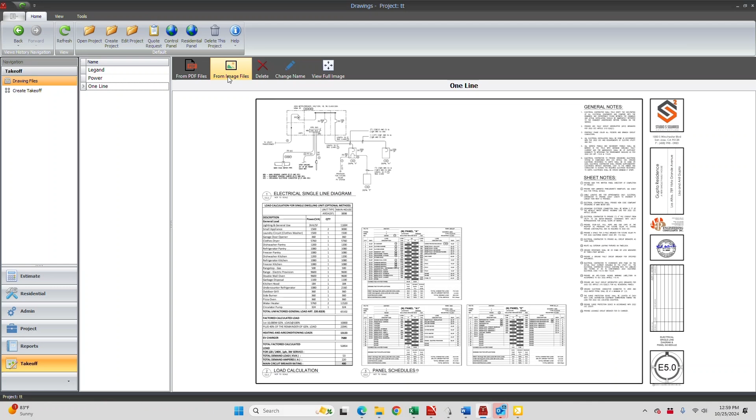Select from image file. You can also import multiple PDFs at one time. It's just a new feature. So you would select that, select the file, and let's say that this is split out.

So you can batch import, holding the Shift key down, a selection of files, and hit OK and import.

We're going to import these 7 pages. That keeps you from having to import them one at a time if you wanted to add to the list.

So we're going to give it a second to import, then we're going to talk about that.

Okay, so now we've added these 7 pages just randomly selected, and we can see that there are MEP pages. That was just by luck, I didn't know what the pages were.

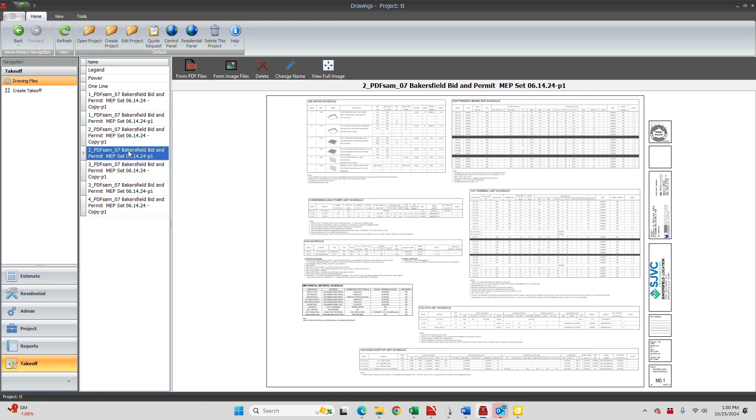In reality, they wouldn't be of any use to the electrical, but you can still reveal them to see if there's anything on them that you might make use of.

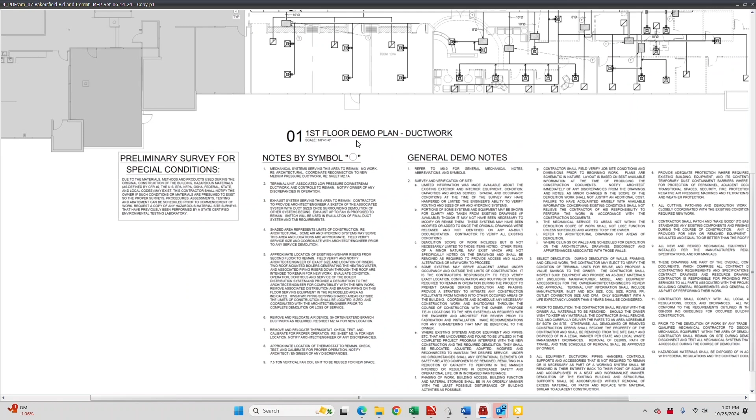So also another feature is if you hold the Shift key and use your roller mouse, the screen goes left to right. So you have up and down for the zoom, and then left to right, all from the mouse. Was a pretty good feature.

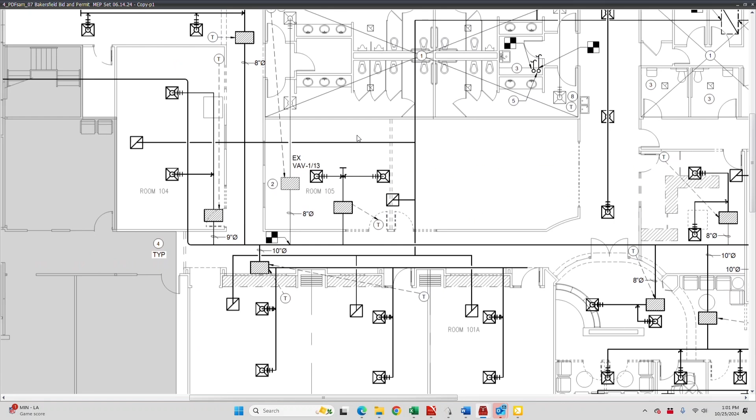Again, you would want to rename just as something reasonable in MO.1.

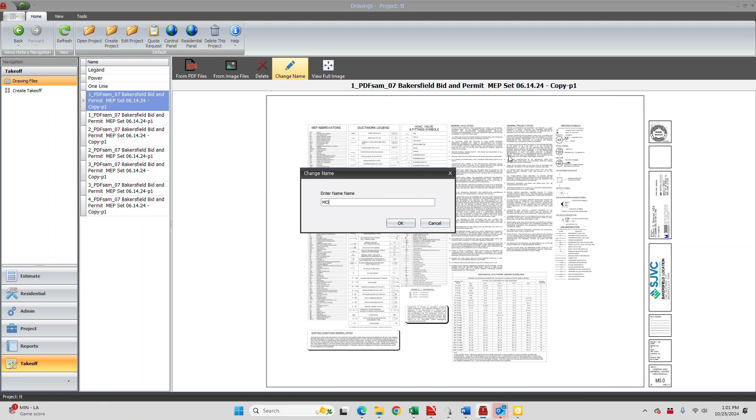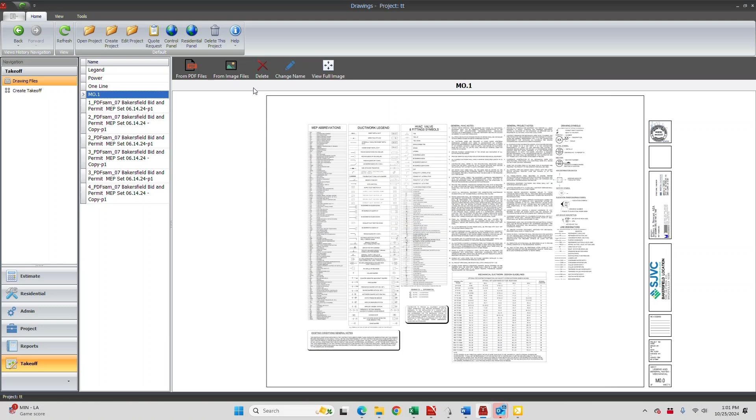For now, you know what the sheets can be. So you can keep adding multiple files just by selecting them. So you're not limited anymore to just one series of uploads.

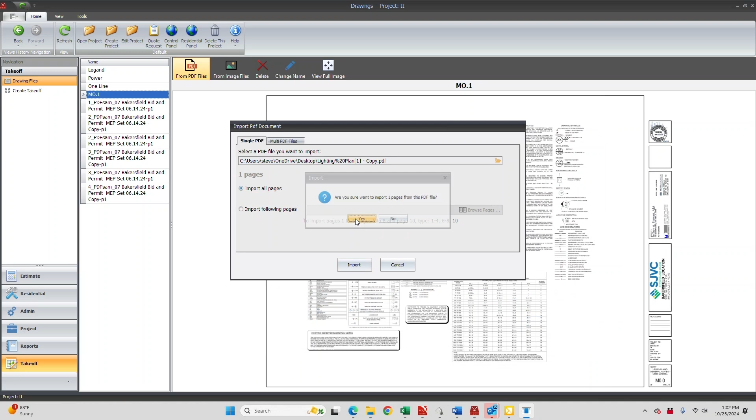So I'll just upload one drawing in addition to these drawings. And it's going to be a lighting plan drawing, where then I go to the lighting page.

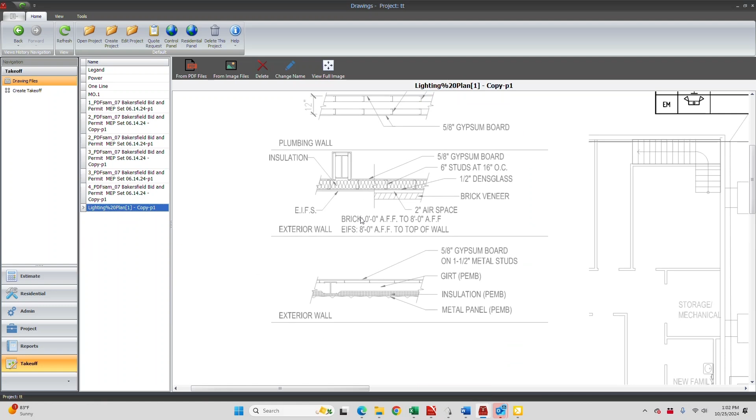And that's what I'm looking for. So I'll be good to go.

So now I just would go select, create takeoff, and new. My name's already given, that's going to save time, some other new feature.

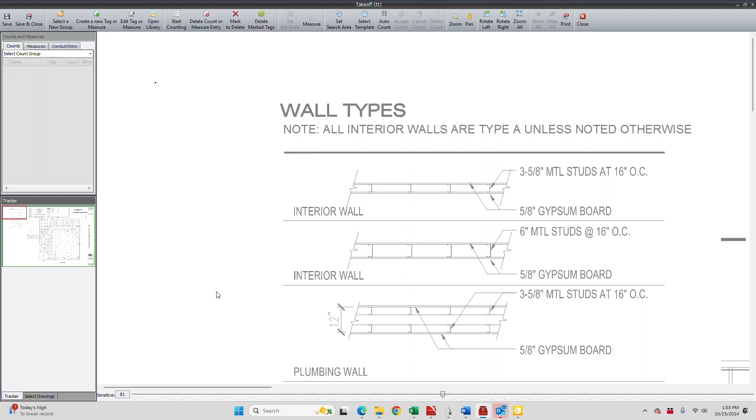Select the page that you want to work on, and you're good to go.

You also have the same mouse control on your takeoff page. So if you hold the control key down, you can zoom. Shift key, you can go left to right. You can go up and down. So you have full control.